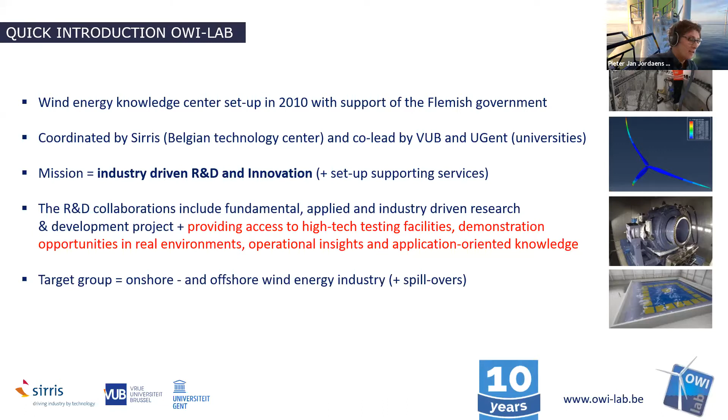With respect to that, the three partners have set up unique testing facilities over the years, with dedicated testing services being set up or in development, which we want to share today with you. We've already been doing this for 10 years, so there's also some experience which we will share today in 4 individual presentations by the experts.

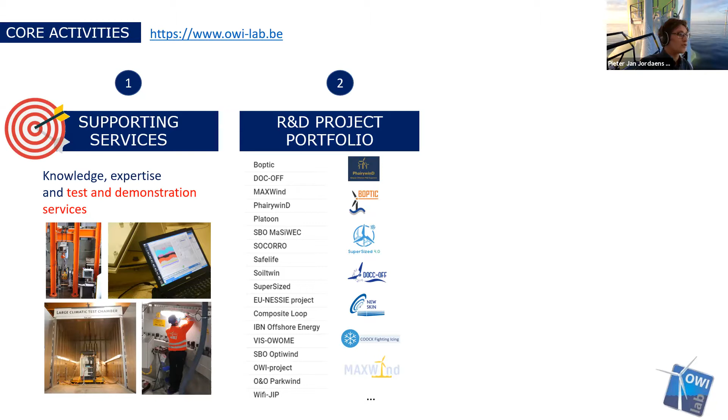So the talk of today is the supporting services with respect to testing and demonstration. There's also other activities within this consortium - there's a broad R&D project portfolio, which will probably be something for upcoming webinars where we'll deep dive into some projects and share insights. The third action is sharing innovation and inspiration with the industry.

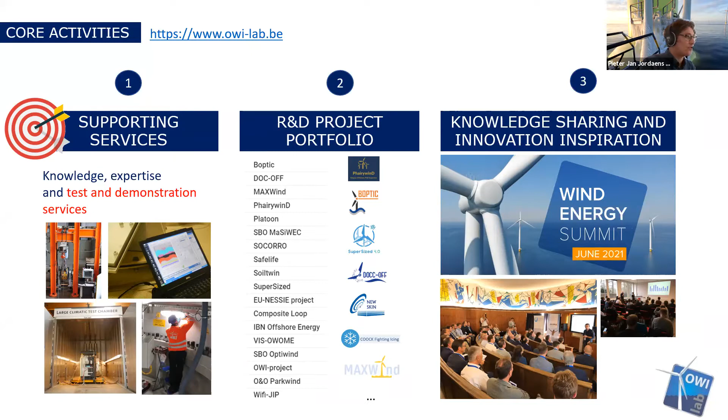Later on, at the end of this session, I will also give you an insight into what is coming up next, as we are organizing a wind energy summit in June with 3 specific actions.

So the talk of the day is testing and testing facilities, and I will give the word in a minute to Professor Peter Troch from the University of Ghent, who will focus on a wave tank testing facility.

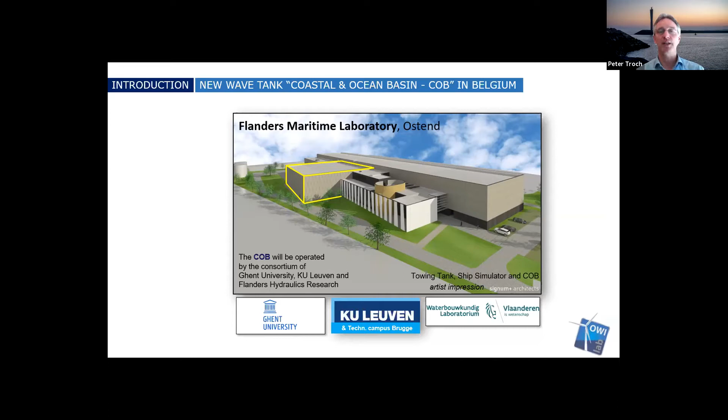In fact, the largest module is in the back - it's the new towing tank of Flanders Maritime Laboratory. Our COB will be operated not only by Ghent University, but by an excellent consortium made of two academic partners, Ghent University and KU Leuven, and Flanders Hydraulics Research, the governmental research laboratory. Jointly, we will operate the coastal and ocean basin.

If you do not really know what a wave tank is, this could be interesting for you. Basically, a wave tank is nothing more than a wave basin in which we put a scale model of a coastal or offshore structure at a particular scale, and subject it to wave and current loadings. Wind loading is also included in our case. These loading conditions are generated artificially, but once they exist, the scale model responds to the loading. If you follow the right engineering laws, the response of the model is very representative of the real prototype.

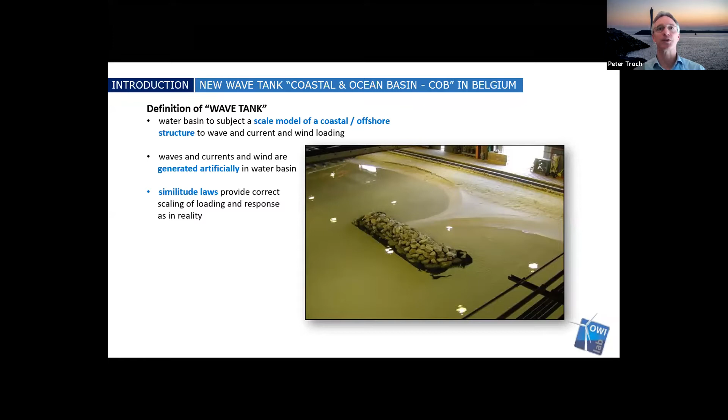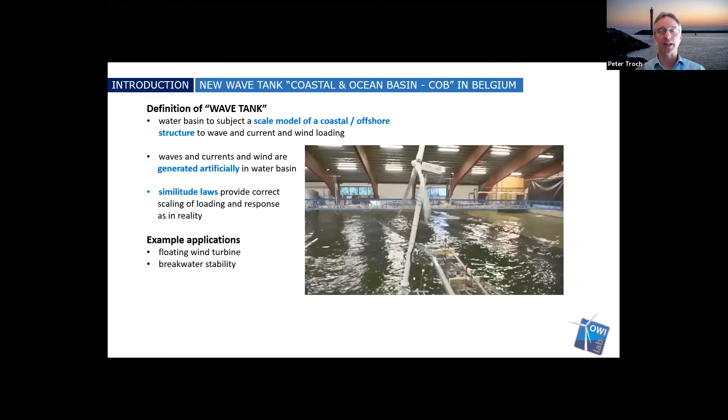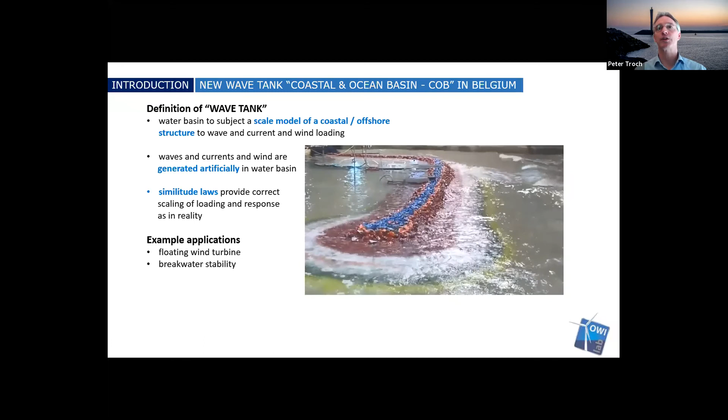Just a few quick examples: this is a floating wind turbine, tested in a wave tank under waves and wind loading. Another typical example is a scale model of a rubble-mound breakwater, where the armor layer stability is tested under oblique wave action.

Our wave tank is widely applicable to a very wide range of client profiles, and also for a wide range of different project stages, going from early concept checks during further development of a project, to design validation of a complete design, or testing details of a particular design. Even during installation or the operational phase, it's perfectly possible to do tests in our COB for your structure.

In terms of environmental loading conditions, we focus in a wave tank on waves, currents, strong winds, and maybe also a little bit on flooding cases as the main focus.

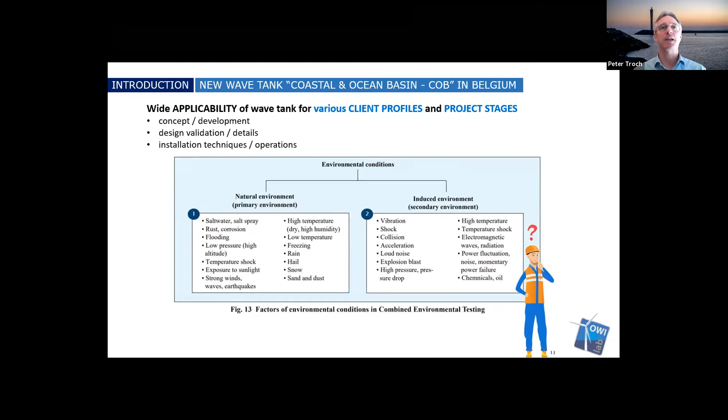Welcome to the Coastal and Ocean Basin, or COB, in the Flanders Maritime Laboratory in Ostend, Belgium. The COB is operated by a consortium composed of Ghent University, KU Leuven, and Flanders Hydraulics Research.

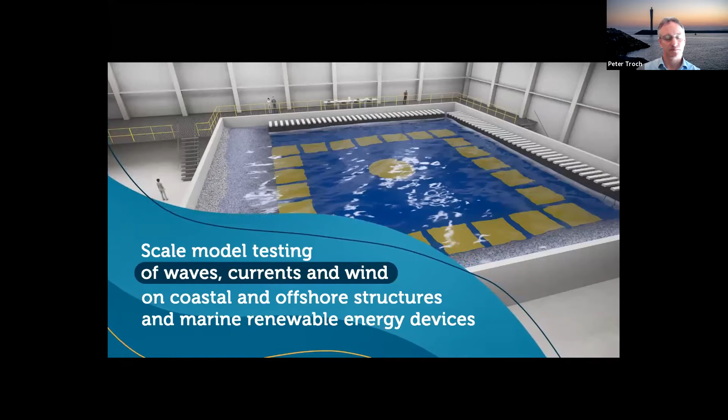The COB is a wave tank with unique features which we'll present to you. The wave tank is used to test a wide range of scale models, ranging from coastal and offshore structures to marine renewable energy devices, under the combined loading of waves, water currents, and wind. The COB welcomes users from academia, industry, and governmental institutions, with the opportunity to develop innovative designs for coastal protection, offshore structures, and offshore energy devices.

As part of the Flanders Maritime Laboratory, the COB is strategically located in Ostend Science Park in Belgium. It's close to a range of stakeholders who are very active in the blue economy and to other testing facilities such as the Blue Accelerator platform just outside the harbour of Ostend in the North Sea.

The COB is a state-of-the-art wave tank composed of a 30 by 30 metre concrete structure with water depths between 0.3 and 1.4 metres. A 3.1 metre deep central pit enables testing of mooring lines in deeper water conditions.

High-quality wave fields with a maximum wave height of up to 0.55 metres are generated using a state-of-the-art wave generator along two sides of the tank.

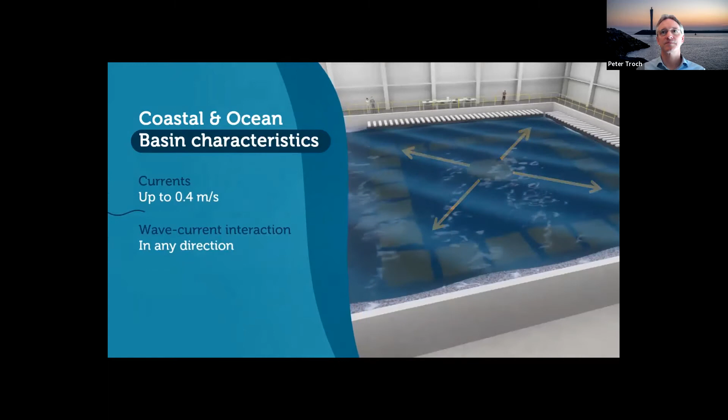In addition to the wave generator, a current generator is installed, generating currents of up to 0.4 metres per second. The currents can be superimposed on the waves, generating wave-current interaction at any relative angle. This unique feature will allow for better and more efficient designs of the tested structures.

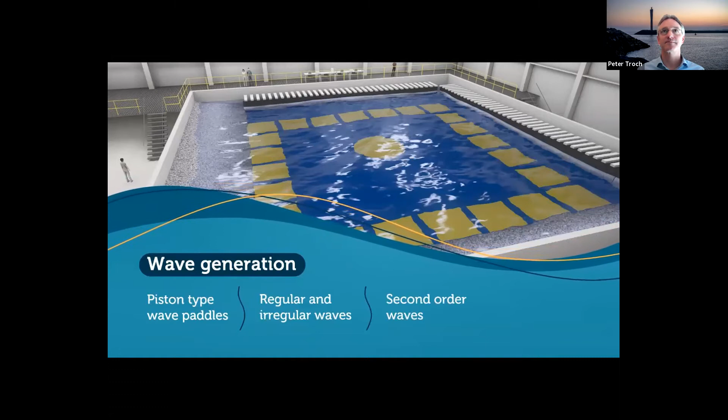The state-of-the-art wave generator is positioned along two sides of the wave tank. It's composed of piston-type individual wave paddles, and generates highly accurate wave fields for regular and irregular wave conditions, including the option to increase accuracy with second-order wave generation functionality. The wave generation system is also equipped with active wave absorption to minimize the amount of reflected waves in the COB.

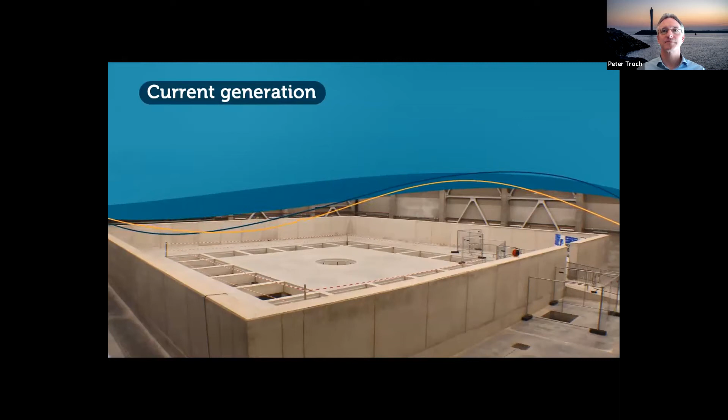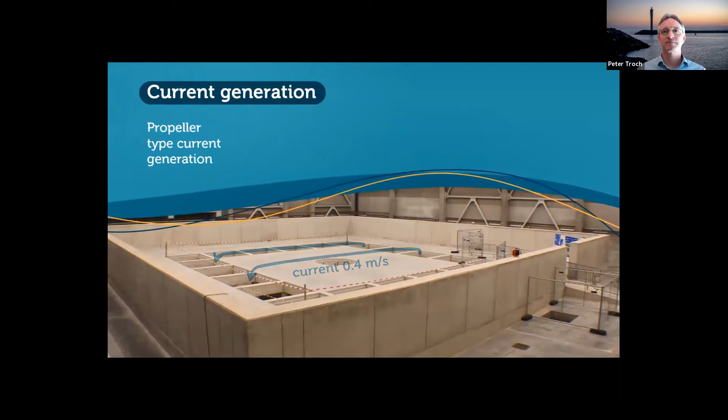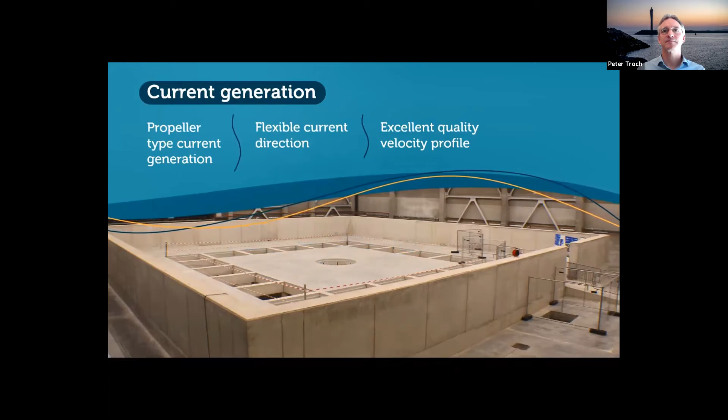To correctly model the impact of strong tidal currents along our coastlines on the scale models, the COB has a current generation system. The current is generated using propellers in the current tank, located under the wave tank floor. The propeller-generated flow in the current tank is smoothly introduced into the wave tank via grids in the floor, designed to achieve an excellent quality velocity profile. The current is generated in two main directions and interacts with the generated waves at any relative angle.

The COB and its testing services are designed to facilitate the needs of the coastal and offshore engineering community for a very wide field of applications.

Scale models of coastal structures such as dikes, breakwaters and harbours are tested to study wave structure interaction, armour layer stability, wave overtopping and wave transmission.

In the COB, tests are conducted on large and more traditional offshore structures such as oil rigs, but also on innovative designs of floating structures with hybrid marine energy conversion technologies in both extreme and operational wave conditions before they are built. New coastal defence designs, involving nature-based solutions in combination with more traditional structures to tackle sea level rise effects, are challenging. The COB is offering new opportunities to test these nature-based solutions.

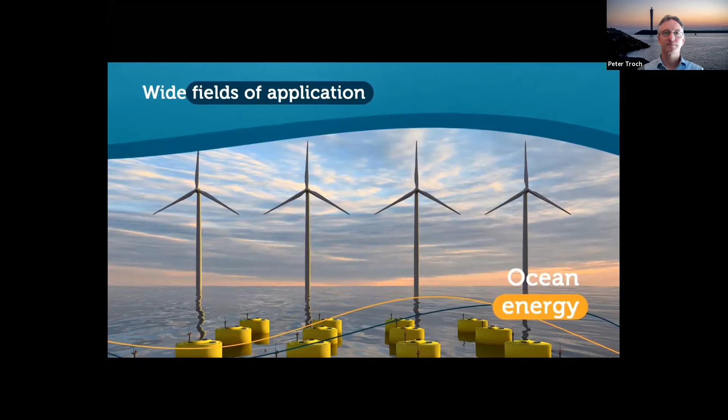Harvesting ocean energy using wind and wave farms is a challenging task. Design of the energy conversion systems such as offshore wind turbine foundations and wave energy conversion devices are carried out in the COB. Finally, the COB is a perfect testing environment for less obvious applications in the fields of wave interaction with floating structures for the offshore fish farming industry, mooring applications for floating wind turbine applications, or pre-operational studies of ocean observation equipment.

The first projects in the COB will be exciting and pioneering industrial and academic projects.

First, commercial 3D breakwater tests in the COB are conducted for the two large dredging companies in Belgium. The COB consortium partners, Ghent University and KU Leuven, are investigating wave energy farms and extreme waves in their international research projects. European projects can access the COB for their activities. Further, Flanders Hydraulics Research will carry out studies to support the governmental policy on coastal defence.

The COB consortium invests in knowledge sharing with its partners. Regular seminars with the industrial, academic and governmental sectors are key to the COB's success.

From the very beginning, the COB was supported by the key players in the Belgian coastal and offshore engineering sector, as well as the marine energy sector, who endorse a high-level wave tank facility.

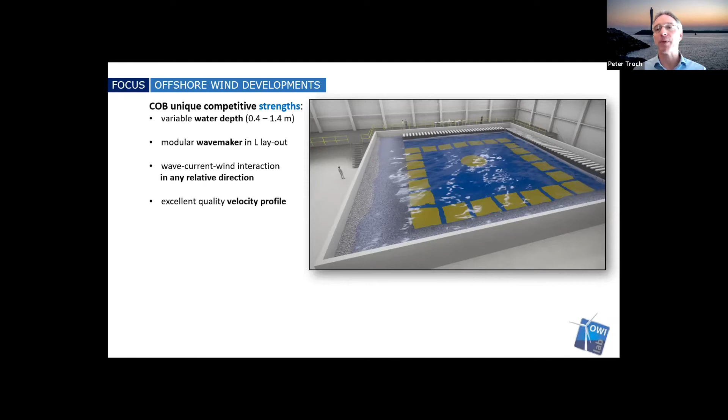Both our wave and current fields will be generated to the highest accuracies available as state-of-the-art, and we will be able to include any relative direction between waves and currents. I would say also there we are one step further compared to existing infrastructure.

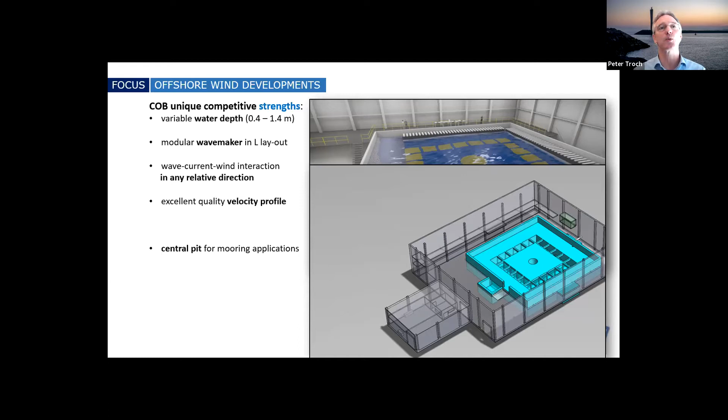It was only mentioned very quickly: in the center of our wave tank floor, we have a central pit of 3 meters diameter and 3 meters depth, in addition to the available water depth. That makes it a perfect situation to test all kinds of mooring applications.

And then last but not least, it's not only the wave tank and the wave and current systems which are important, also the instrumentation is key.

We were able to acquire a state-of-the-art motion tracking system, as you call it, from Qualisys, where we can purchase, as we speak, 3 camera systems: one above water, a second one underwater to fit the complete range of spaces, and also a mobile system for a specific focus.

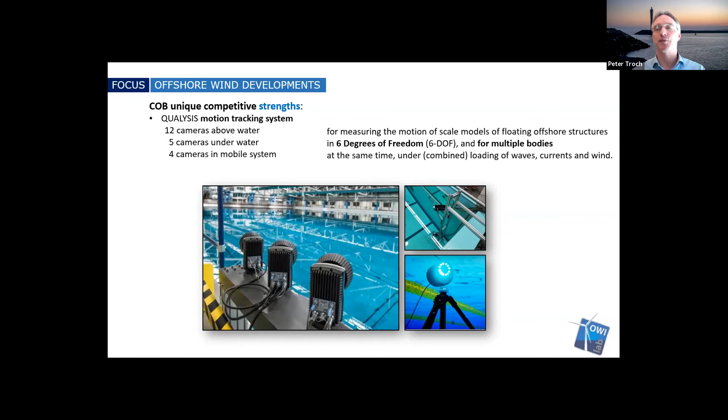With this Qualisys motion tracking system, we will be able to measure the displacements in 6 degrees of freedom of one body or even multiple bodies at the same time, making this instrumentation also very interesting for new developments.

So that was a quick introduction of our new coastal and ocean basin. It's almost ready, and I would like to invite you, once we are operational, to discuss your interests. Thank you very much for your attention, and I guess I give the word back to Pieter-Jan.

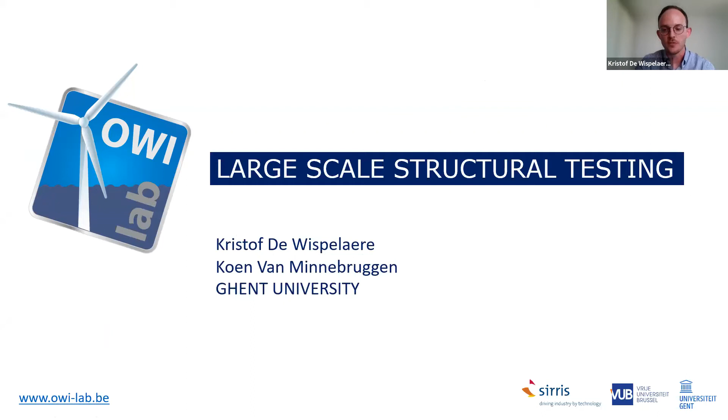Good afternoon, everyone. My name is Kristof De Wispelaere, and together with my colleague Koen Van Minnebruggen, I am responsible for the large-scale structural testing within OWI-Lab. We are from the Ghent University team associated to OWI-Lab.

So what do we mean with structural testing, or what do we focus on? We focus on coupled damage mechanisms, and that covers the range from abrasion, erosion, corrosion to fatigue, fracture, friction and wear, and of course the potential coupling between all those.

If we think of an offshore wind construction, typically some of these damage mechanisms occur at various parts of the structure. There's the well-known leading edge erosion problem. Within the turbine, there are various tribological contacts, so phenomena related to lubrication, friction, and wear are important. And if we think about, for example, the monopile or jacket structure, fatigue and corrosion are very important aspects.

In our testing, we focus on either the design phase or the O&M phase, so root cause analysis. What we do is component design, material characterization, and testing. I should also mention that while we have large expertise in offshore wind, the testing infrastructure I will present today is not only applicable to that area, but to various other offshore constructions, for example dredging industry or other types of offshore energy.

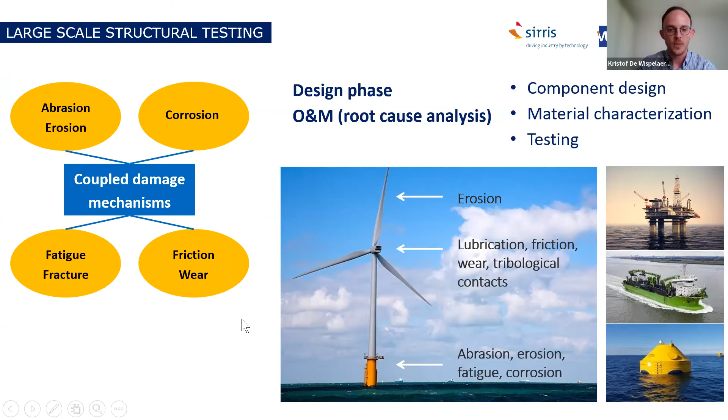So what are the testing regimes that we cover? Typically in a lab environment, you would like to test specimens or coupons, but what we really focus on is the testing of components and structures. What we mean by that I will cover in a minute.

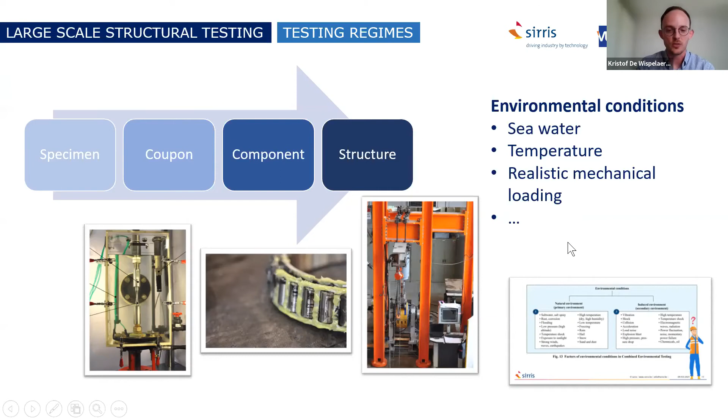Particular focus is also on mimicking as closely as possible the environmental conditions. Pieter also mentioned this, and this figure already passed by a couple of minutes ago - conditions related to seawater or the motion of the sea, temperature, realistic mechanical loadings. We really try to mimic this as closely as possible.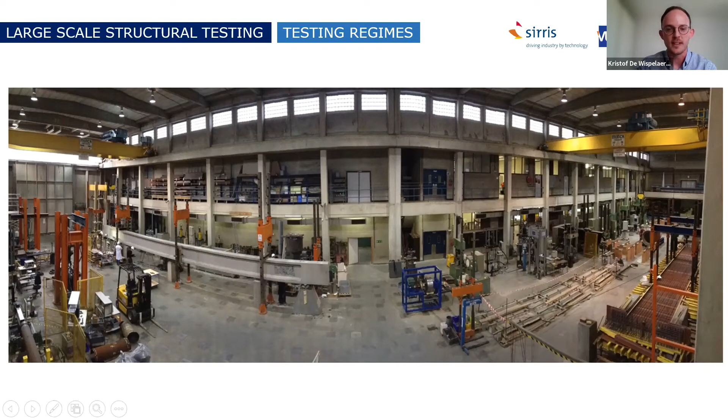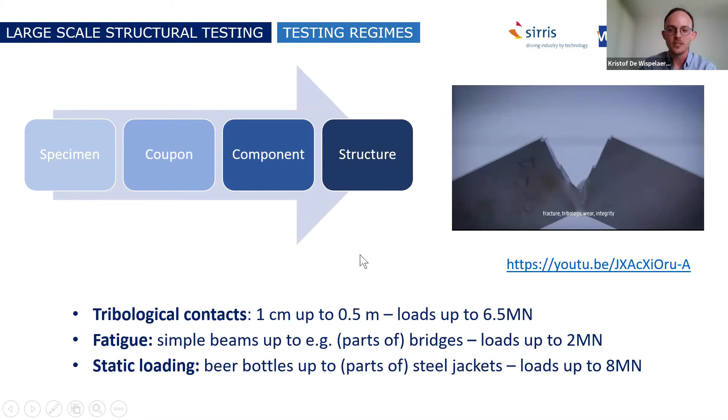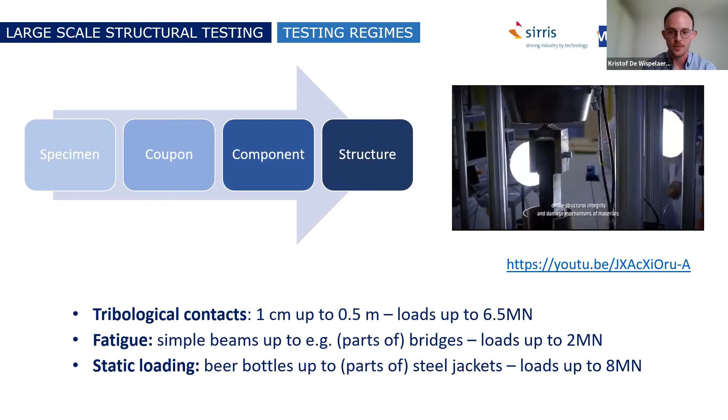On this slide, this video, I will let it play in the background. It gives you a brief impression of the scales that we cover in terms of components and structures, and also the scale of some of our infrastructure. If you would like to consult these videos after the webinar, that's the reason why I posted the link here also on the slide.

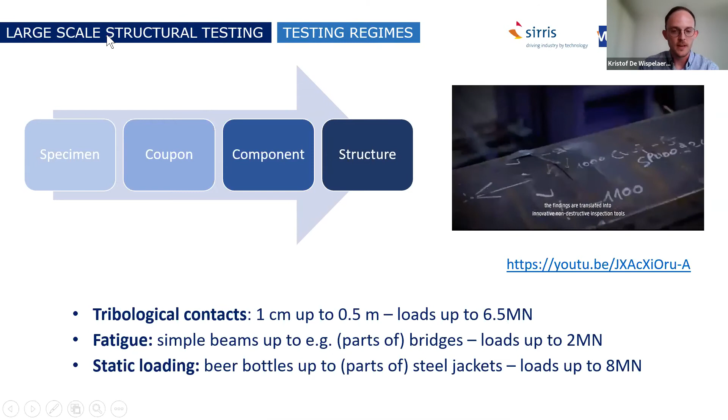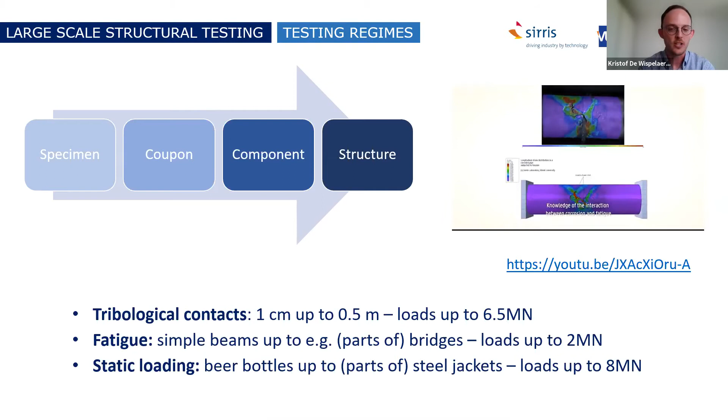What is important to mention here is what now are these large scale, or the scales that we cover. For tribological contacts, we go from centimeter scale up to roughly 0.5 meter, with loads up to a couple of meganewton. For fatigue, we cover the range from simple beams up to parts of bridges, so quite substantially large parts, also up to 2 meganewton loads.

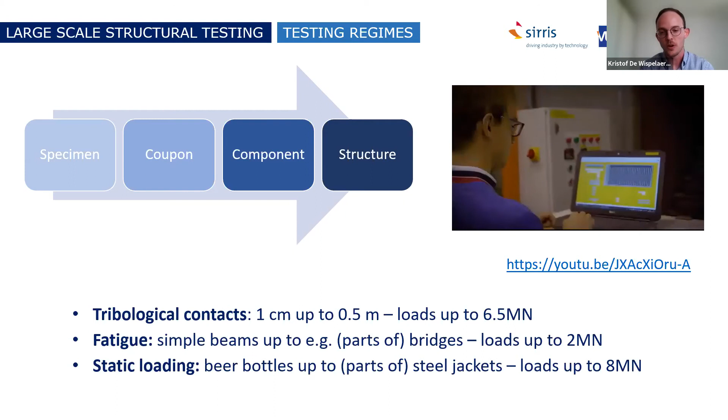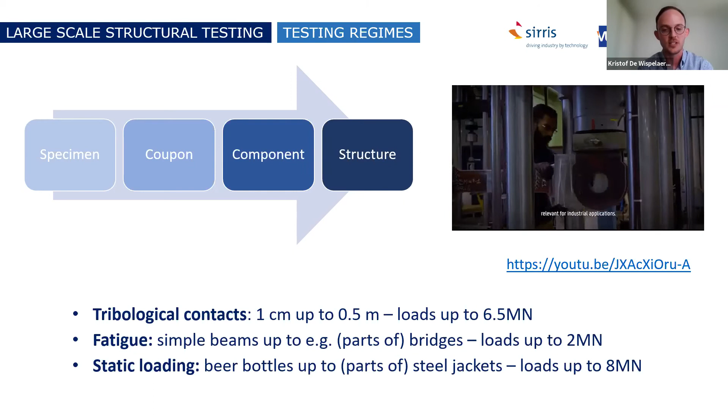And for static loadings, we can go from something the size of a beer bottle up to steel jackets or parts of steel jackets, and loads of up to 8 meganewton. So that is what we cover in this component and structure scale.

Now let's first cover the first part, which is on welded structures. So then we're typically talking, for example, about a jacket structure. Now, an important test that we can do here is fatigue testing in a corrosive environment.

Primarily, we do this on a component scale, and here, bottom left, you see a figure of our setup there - a fatigue test surrounded by a chamber in which we can perfectly control the corrosive environment. That's again this link with environmental conditions. And we can also upscale this type of fatigue testing to larger structures.

What we typically get from this are SN curves for fatigue, and we also study crack propagation. Also important to mention is that we not only have the experimental infrastructure to do this, but we can also couple this with a set of numerical tools based on finite elements that has been developed in-house.

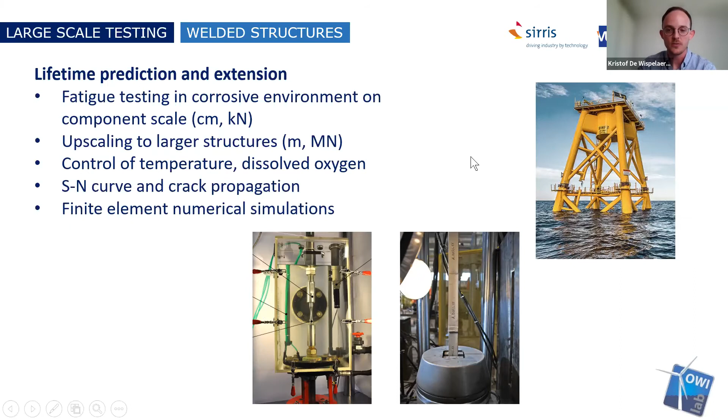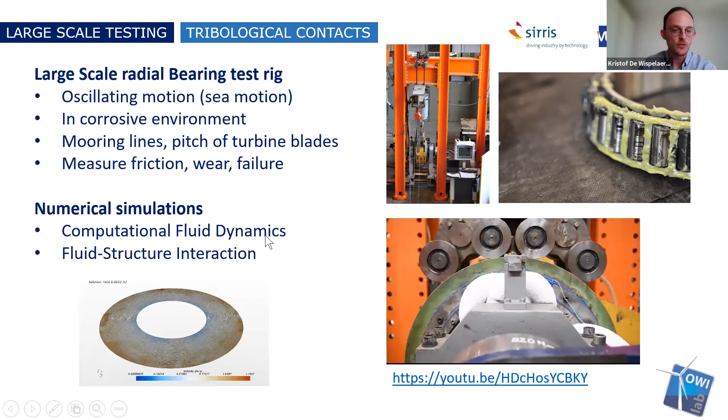What we measure then is, of course, friction, wear rates, and potential failure of a bearing. Also here, the link with numerical simulations can be made, in this case based on computational fluid dynamics and fluid structure interactions, so we can look at lubrication films, pressure profiles, etc.

We can also make the link with all kinds of phenomena that have an impact on the microstructure of the metal that has been used, so for example the material design, the production technique, etc.

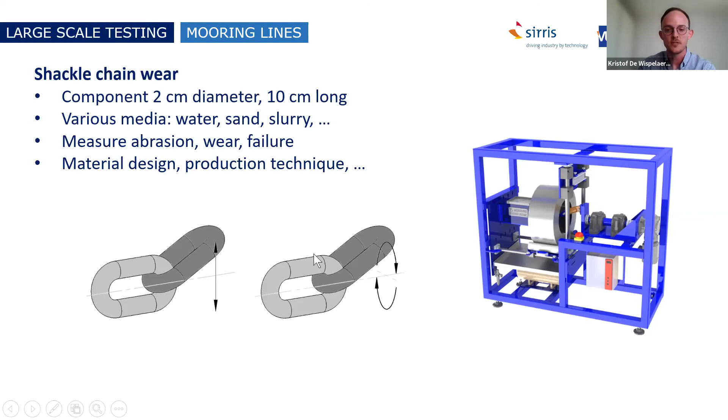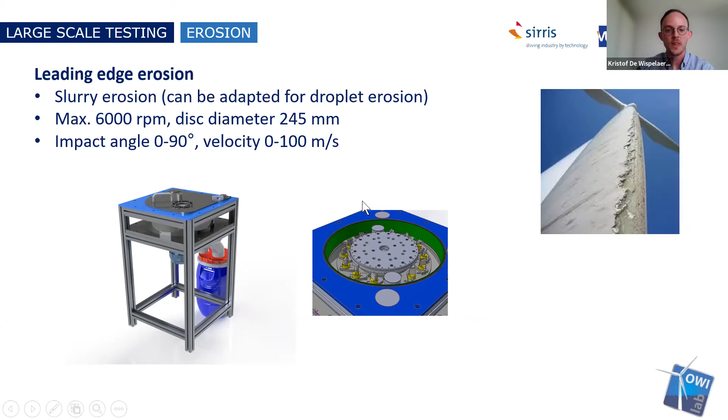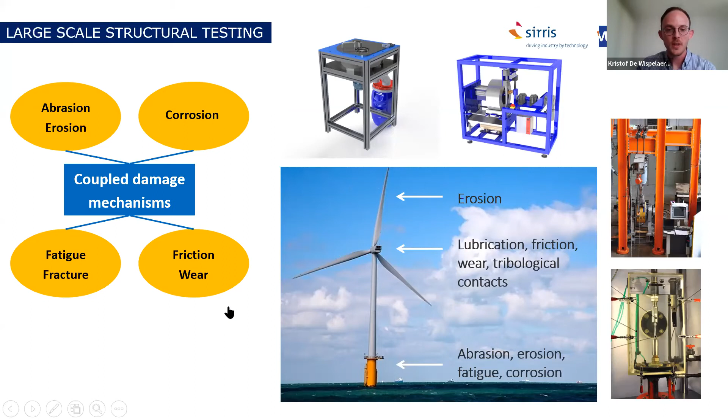So thank you, and I now give the word back to Pieter-Jan.

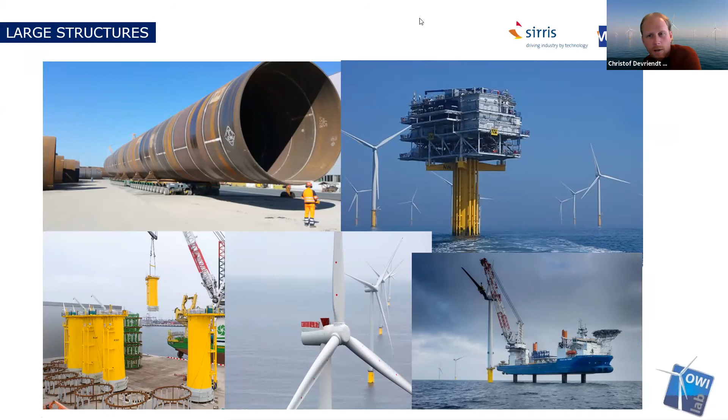So indeed, thank you, Pieter-Jan, for this introduction. In this last presentation, we move from the lab to the in-field, to the real conditions at site. My name is Christof Devriendt. I'm a professor at the Vrije Universiteit Brussel, and for 10 years involved in OWI-Lab, with one of those main pillars being learning from the field—testing of large structures. The large structures we tackle in our research and services range from large offshore foundations, monopiles, jacket structures, transition pieces, up to the offshore wind turbine itself, but also installation vessels such as jack-up vessels, and the offshore substation and all its large components.

What are the testing conditions at site or in the field? Well, offshore structures are really one of the most dynamically excited structures in the world. On one hand, they are subjected to environmental loads such as wind, waves, and earthquakes. On the other hand, you also have the induced loads and vibrations coming from equipment and components installed on these structures, such as the rotors, the engines, or the switching gear on an offshore substation. So that's what you will find when you go into the field.

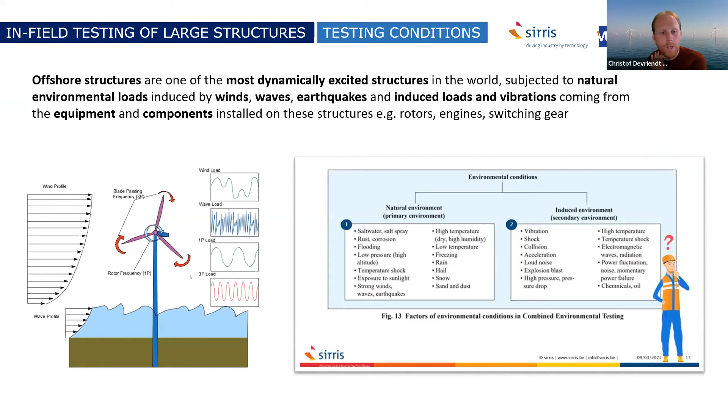What is the motivation of learning and testing or monitoring in the field?

It's a bit the same, of course, as in the lab, but let's present the three pillars. I think we are doing today in-field testing in the design phase for design validation, design optimization, or also certification of, for example, new foundation concepts.

In the O&M phase, we're using data to gain operational insights, do O&M optimization, or root cause analysis in case of failures. The last aspect, which is getting more and more attention lately, is collecting data to really understand what the real loads are at the site and how lifetime of these structures is consumed, to be able to one day make a decision on the remaining useful lifetime.

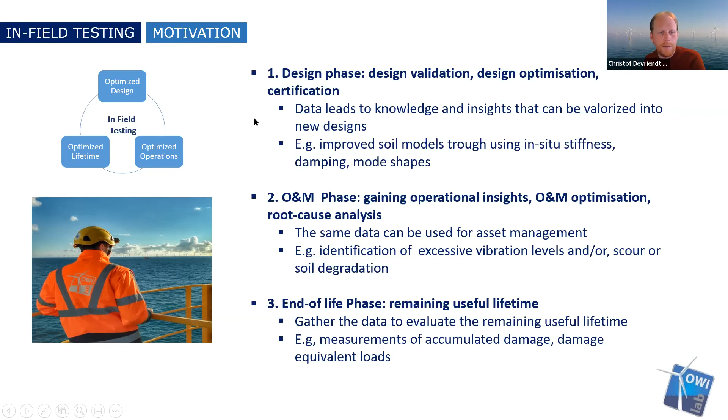So what is the type of measurements we do for these several aspects, and what is our approach? Over the last years, we have developed short-term and long-term measurement systems. Short-term measurement systems are when you perform measurements that last between 1 day and 2 weeks, using small mobile measurement systems mainly consisting of accelerometers.

Long-term measurements involve a measurement system installed for 2 weeks up to several years, and they are often focusing on loads using strain gauges.

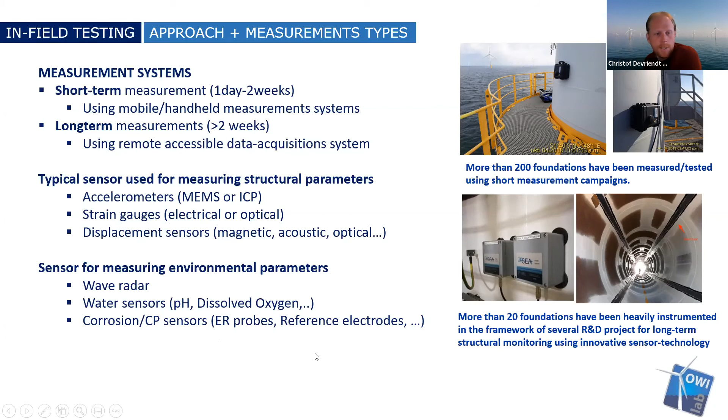So I already mentioned some of the typical sensors used in our monitoring and testing approaches: accelerometers, strain gauges, displacement sensors. But for measuring environmental parameters, other sensors might be added, such as a wave radar for wave heights and wave directions, or environmental sensors linked to water quality and the corrosion system.

Out of these 10 years of in-field testing, I'll give you a quick overview of some of the data that has been evaluated over the years. We've been focusing mainly, in the beginning, on the evaluation of in-field frequencies of offshore structures by collecting vibration data and using state-of-the-art operational modal analysis.

This has been done, for example, to compare as-designed frequencies with as-built frequencies, and to evaluate the effect of scour protection on the resonance frequency, where you clearly see the increase of resonance frequency after installation of rock armor.

It's also being used in the operational phase to evaluate the effect of storms on frequencies, where you can clearly see a drop during the storm and a recovery afterward.

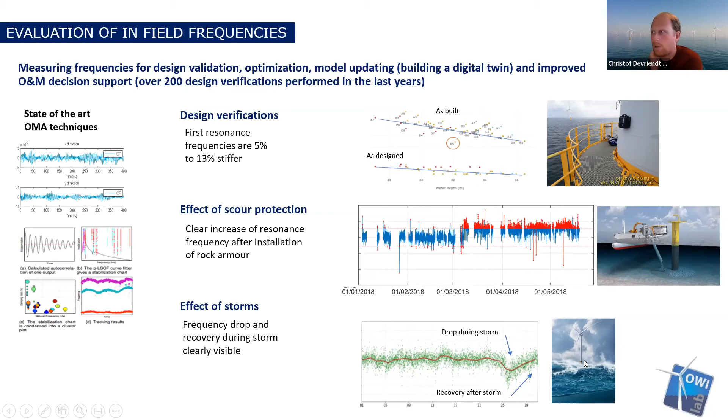Another important parameter, which several offshore testing and monitoring campaigns have addressed to get a better understanding of, is damping. We've been analyzing damping within a wind turbine to see how it evolves as a function of wind speed in the fore-aft and side directions.

It's also very important to compare damping values of different structures. You clearly see a big difference between jacket and monopile foundations in terms of damping. But what's more interesting is understanding how damping differs between turbines within an offshore wind farm. This is all information that can be used toward design optimization and better understanding the dynamic behavior of offshore structures at site.

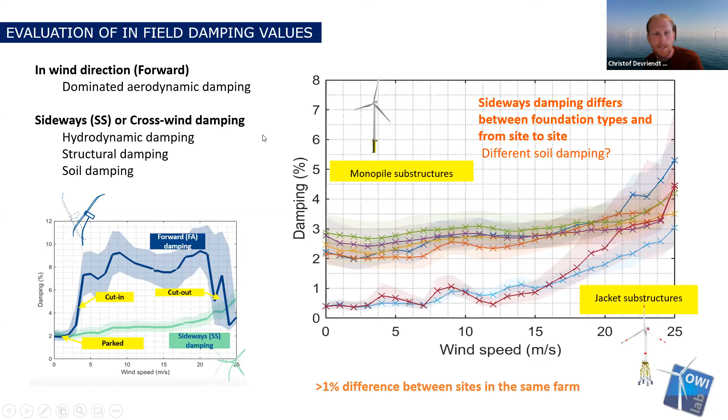Another aspect focused on subsoil bending moments, using optical strain gauges. Over the last years, we've instrumented several monopiles with optical strain gauges over their entire length, going even below the seabed, to better understand how those bending moments behave, so we can compare as-designed with as-measured bending moments to assess the quality or improve soil-structure interaction models, such as the API or the currently used PISA standards.

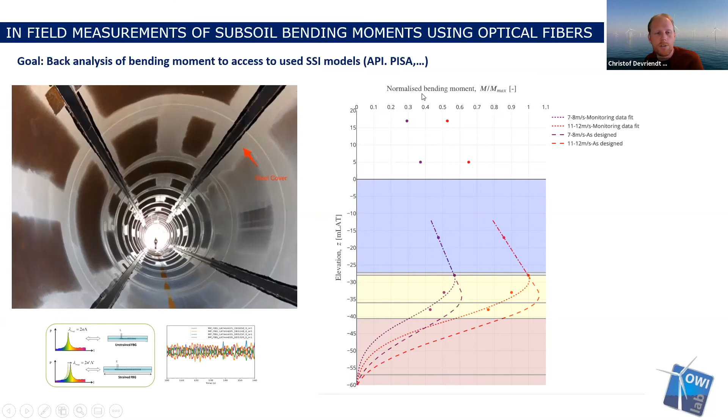As you understood, all this kind of in-field measurement is really focused on improving the design of future wind farms. But we're also now using it more and more in a digital twin context, where we try to update models of each foundation within a wind farm in a monitoring context. This is really part of some of the R&D projects, as Pieter-Jan mentioned, that we're currently involved in.

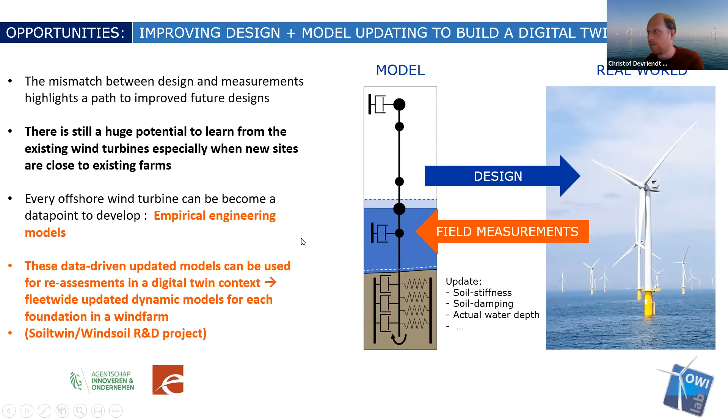We have not been doing this alone for offshore foundations. As I said, we also looked at the dynamic behavior of other structures, such as jackup vessels. Here again, it was to really understand how, for example, the frequencies of surge modes and sway modes depend on the operational and environmental conditions, where by testing and monitoring you can get an idea of how these frequencies depend on factors like jackup height.

Or even how we see differences between the different locations where the jackup vessel is installed. This again can feed into a better understanding of operating such a structure or improving design methodologies.

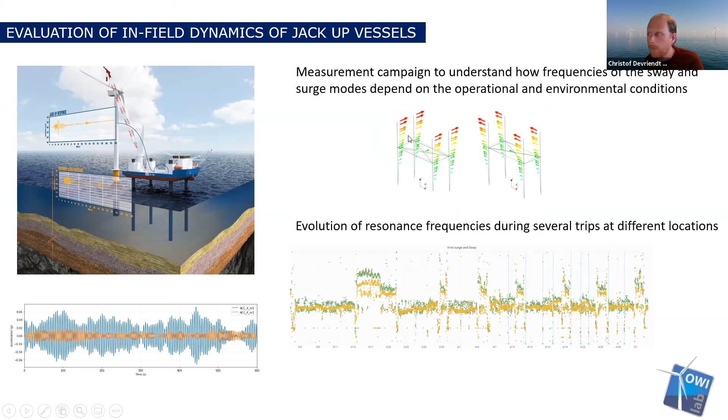A last example of why you can test and monitor in the design phase is for design certification. This was the case for Van Oord for their slip joint foundation, where we instrumented the slip joint with over 100 sensors, such as accelerometers, but mainly strain gauges, to get an idea of the bending moments and hoop stresses on such a foundation during installation and operation. The goal was supporting them for certification of this slip joint project.

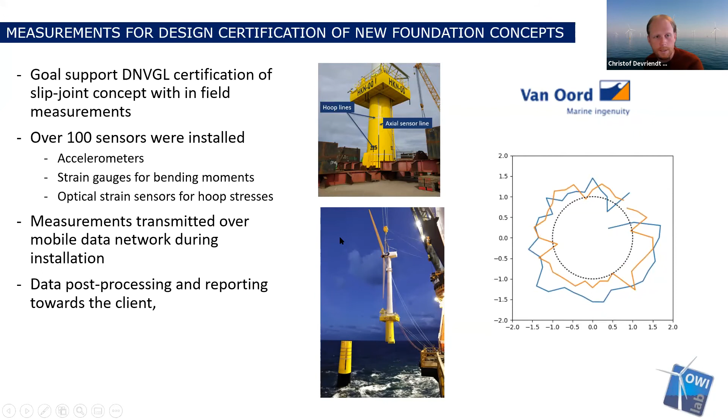I think you have here a very nice illustration on how, for example, the hoop stresses on these foundations evolve at the moment the slip joint is installed. So again, in-field testing is a necessity to support this kind of certification and design improvements.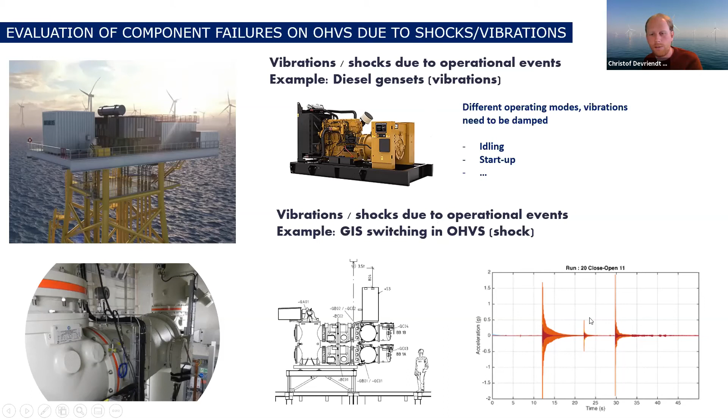But also on wind turbines, excessive vibrations have been found and had to be investigated. Here again, we come to the fact that you can have vibrations due to natural causes, such as the effect of wakes, or also rotor-induced vibrations, such as unwanted 1P rotor imbalance vibrations due to mass imbalance and aerodynamic imbalance, introducing vibrations in the first order mode and excessive loads on the foundation.

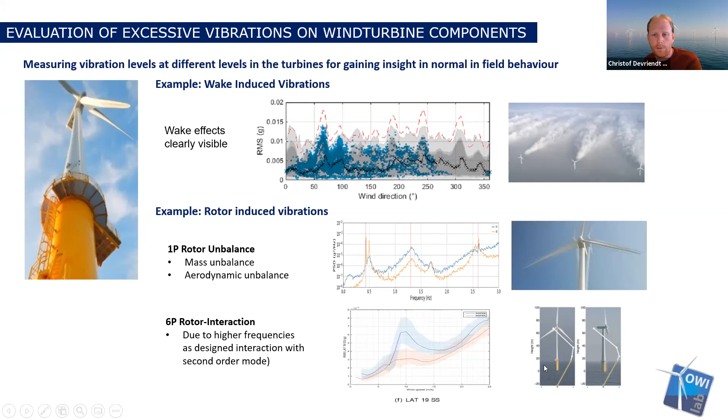But you can also have issues such as 6P rotor interaction, where there's an interaction with the second order structural mode, and as a result you get higher vibrations on the working platform. This might result in employees complaining about vibrations on this platform, or equipment installed on the platform suffering from higher vibrations.

And then the last two slides cover the fact that, as I said, more and more we are launching monitoring and testing campaigns to get a better idea of how the loads in the field compare with as-designed, both for design optimization, but especially also for lifetime assessment purposes.

So here we're really talking about the use of strain gauges, for example, to get an idea of how the bending moments of such an offshore foundation evolve or change in different environmental conditions. You can then also do rainflow counting and estimate fatigue parameters such as damage equivalent loads. Here again, the effect of wakes on the damage equivalent loads is clearly visible.

But what is especially interesting is to very well understand how the loads on an offshore foundation depend on different operating conditions, ranging from parked, to run-up, to rated power, to cutout conditions. This might be very useful information for an operator.

For example, to see how park conditions for modern wind turbines, in the absence of aerodynamic damping, can really result in higher load levels. So availability for modern wind turbines really becomes a lifetime driver, and having a good idea of how they behave in the field is of course very valuable.

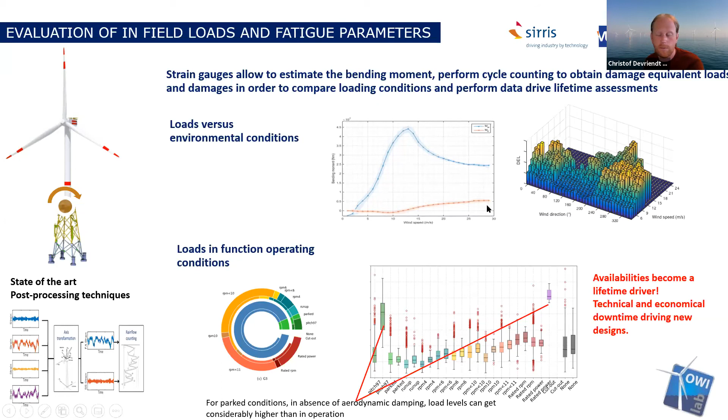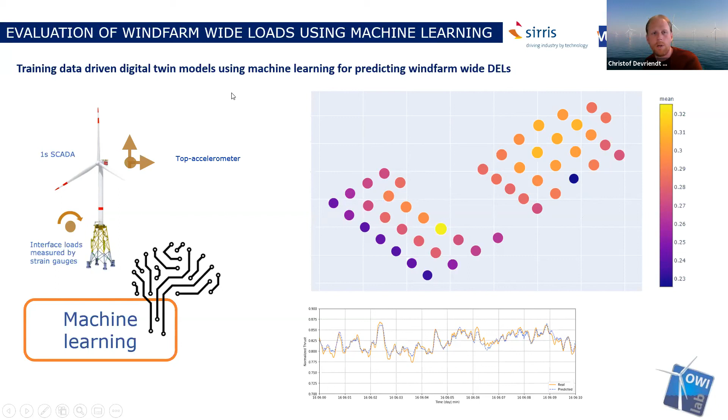And finally, we are using this load data today to build data-driven digital twins, I would say, where based on the SCADA data and the interface loads, and applying machine learning algorithms, you can use this in-field strain data to get an idea of the loads over the entire wind farm by only measuring at a subset of your foundations. This is a very interesting evolution we are now seeing, and again shows what in-field testing and monitoring can bring to an operator of offshore structures.

So thank you, this was the overview.

Thank you, Christof, for elaborating on the importance of field measurements compared to the other two colleagues who already focused on laboratory experiments. There's a very good question actually in the chat box from Bart Peters: what is the physical phenomenon that causes a drop in the resonance frequency during a storm, and the recovery afterwards? Very good remark, Bart, that you noticed this. Christof, can you elaborate on that question?

Yes, so it might be the result of a kind of soil liquefaction happening due to the excessive loads during such a storm. It's actually part of one of the R&D projects we are now involved in, to really try to explain this drop in frequencies due to changing soil stiffness in the top layers.

Are there any other questions? Okay, it's well answered. So it's stressing the importance of understanding all the environmental constraints or boundary conditions, as we have showcased in some of the slides. Is there any other question so far? No, then I will take over the screen.

I will present the last presentation, focusing on the use of a large climate chamber in order to validate the effects of harsh environments. It's about this facility, which we constructed 10 years ago in the port of Antwerp. It's one of the largest climatic test chambers, or climatic torture chamber, where we experiment, validate, and test large-scale electromechanical equipment for their functionality in extreme climatic conditions, ranging from -60 to +60 degrees.

Thermal cycling can be tested there, humidity conditions, infrared heat, icing, you name it. We want to recreate every extreme climatic condition on Earth to see how a machine is performing or what issues can occur during such operations.

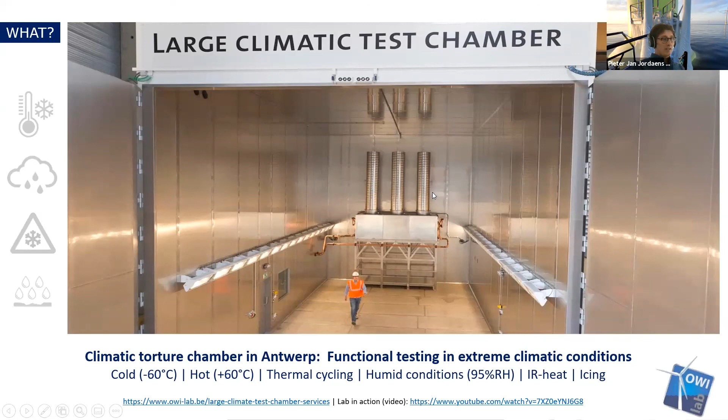Again, the red line within this presentation is environmental testing. Environmental testing is actually taking into account the natural environment or the induced environment, as Christof already explained. In our case, this is focusing on the climatic effects, so the natural environment, like the effect of salt spray linked to corrosion, or temperature changes in low and high temperature and high humidity, but also, for example, freezing events, or thermal shock if it's an induced environment, or high temperatures, as I will explain later.

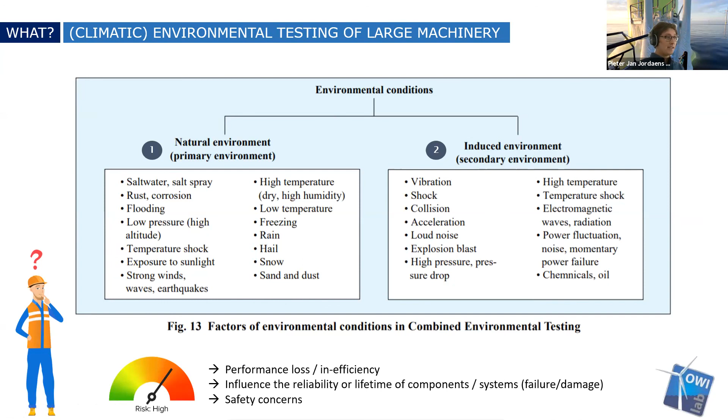It's all about checking the performance or specific performance losses, inefficiencies during such testing, the influence on the reliability or lifetime of components. Will components fail due to certain environmental loads? And in some cases, for example with respect to freezing and icing on wind turbine blades, it's also a safety concern in some applications.

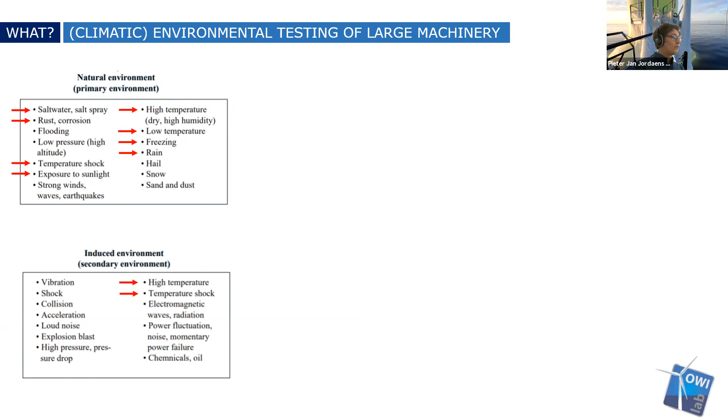With respect to turbines, there are cold climate turbine sites, hot climate turbine sites, and of course nearshore and offshore sites where high humidity and salinity is of importance. I will come back to that later.

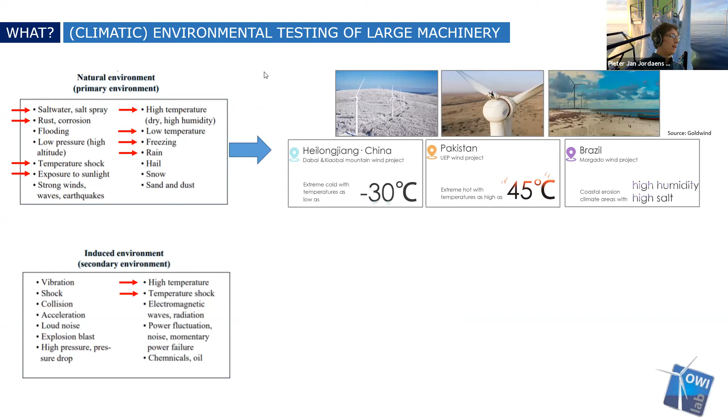To give you an example of induced environments, Christophe mentioned this in mechanical environmental testing, for example shocks and loads from other components that are causing an effect or a failure. Also, with respect to temperature or climatic conditions, this can be the case.

To give you an example, if there is a hot summer and it's 35 degrees ambient temperature outside, and you have a turbine working in full load conditions, you also have an electrical load, which is of course influencing the heat production in certain components. This means that in these cabinets or modules within a tower, temperatures can increase up to 55 degrees or even more, which needs to be taken into account specifically for power electronics, but also for cooling purposes or to determine what kind of cooling you need.

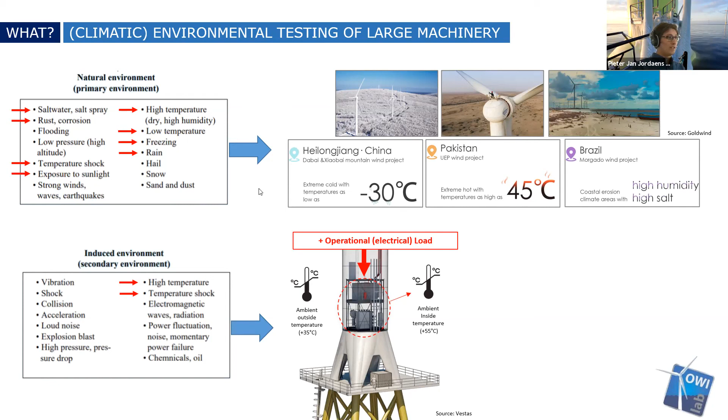All these conditions need to be tested upfront or taken into account in the design when designing these components or these full turbines. Another example is a cold start at minus 20 degrees, for example, when your transformer liquid is very viscous. This can lead to thermal shock phenomena and lead to certain issues or failures if it's not properly taken into account. So startup procedures are necessary to safeguard the lifetime of your equipment.

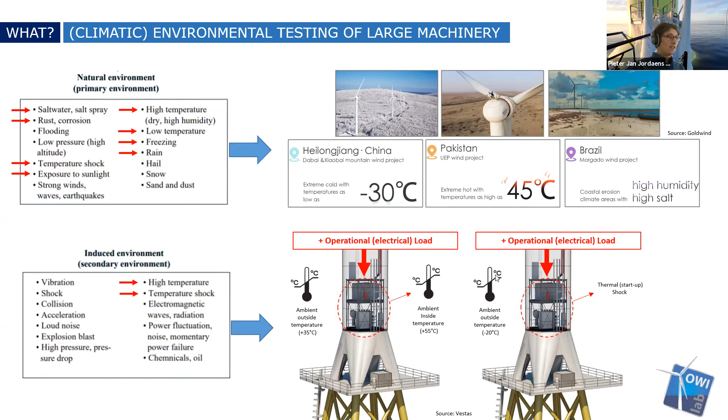Now, why do we do this? Wind turbines are currently installed onshore and offshore everywhere in the world. It's a global market, and also more and more extreme sites are being chosen because the resources are quite favorable there. For example, if you talk about wind energy in wintertime, the Scandinavian context and Canada, those regions are very good to harvest wind energy.

As in wintertime, also the air density is much higher than in summertime. But also offshore, as I explained to you before, and also hot climate sites.